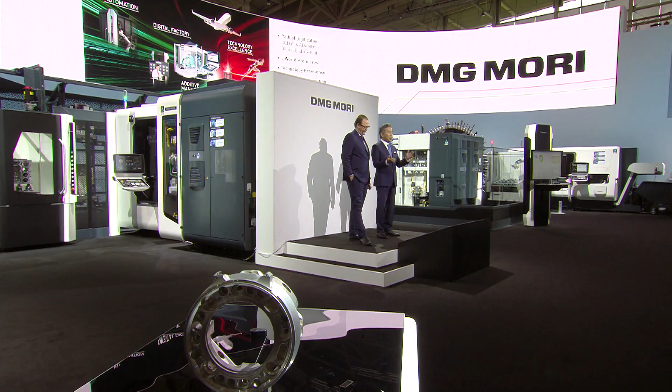Remember, about four years ago, we first introduced Celos in Hannover. Then at that time, people saying, or even our people saying, it's just operation panels. Now you can see that we have very close to 30 application programs with DMQP and technology cycles.

So ADAMOS is just started, but working together with a group, and this is the most democratic, commercially available connecting software for the shop floors.

We also introduced 8 world premieres. I will explain later, the technology excellence concept for aerospace industry, automotives, medicals, or die and mold, and the DMQP working together with partners. We will bring one-stop solution to the customers. And the additive manufacturing, we are becoming a complete solution provider for direct energy depositions.

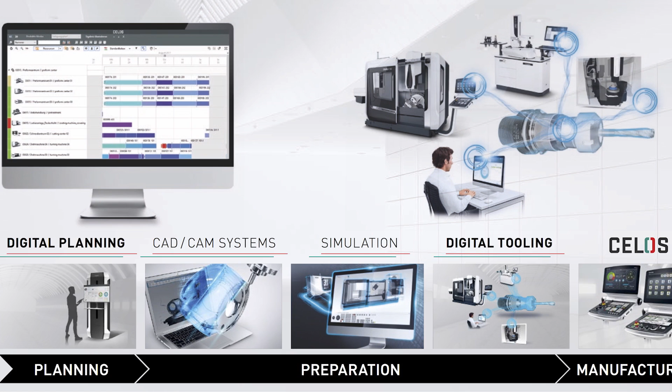A particular highlight is our app factory planning. You see it here. A big chunk, 95%, still work with Excel lists. Excel used to be very useful, but you all know that this cannot be the future. And if you have a good, clean planning process, you have a higher level of transparency and better productivity.

Digital tooling helps to improve the tool handling in a continuous way. The most decisive thing is that already from the planning until the level of machine execution, and in future you will see that we will also offer apps for the service. So we support the customer in the overall product cycle in a continuous way with digital solutions and apps.

So why digital? Most of the people in our company have a very long history with analog data. That is very important, craftsmanship and the history of the technologies. But in case of analog storage, it is very difficult to scan or refer to or learn from the past.

Putting everything into digital, it may not be as accurate as analog, let's say plus minus 5% variations, but by putting all the know-how and the past experience, success and mistakes into the digital world, then the younger generation can refer and search such kind of technologies in a very quick manner.

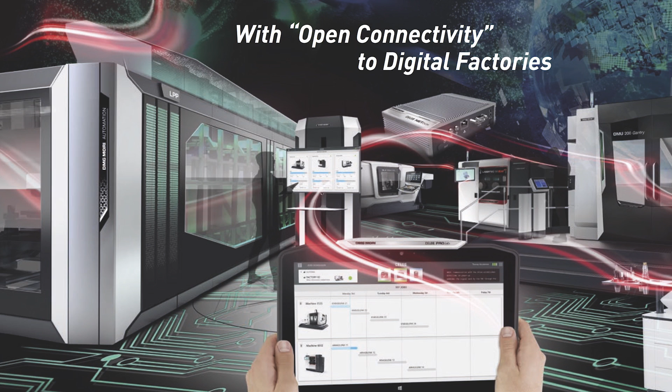What you see here very clearly is that we always think in terms of products. This is not fantasy, we do not only want to give you just information for your articles. We want to deliver products. We start with the NETBox, with preparation of the data, visualization, and then data analytics. We want to offer intelligent and adaptive processes and products. The positive thing is that we are showing concrete applications for our customers.

Netbox, ProTap, and Cockpit. On one hand, you have our machines, but this is also open to third companies. Everything in one environment. And this is now the highlight, something that we've developed lately.

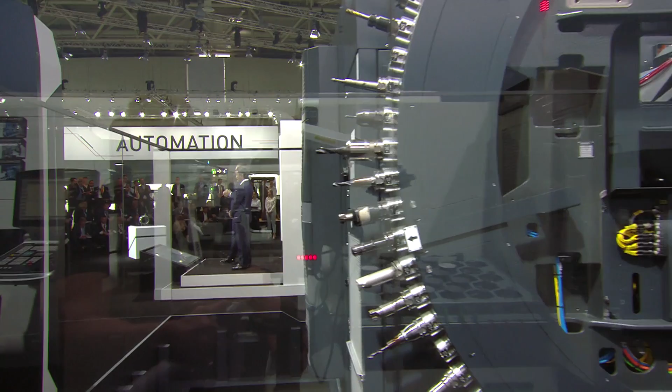ADAMOS, not the sailor's cockpit. ADAMOS, to put it in simple words, used to be an idea of the aerospace industry, and we transferred it to the machine tool builders branch. We, the partners, are convinced that such a solution should be an open platform, and it has to be continuous. We, as big innovators, together with other partners - Dürr, Zeiss, ASML, ASM, and also Software AG with their digital experience - we are convinced that we offer a perfect solution. The idea is that we are offering a continuous solution for the machine, from machine builders to machine builders. It's a fantastic solution for our customers.

At this moment, there are many requests coming from customers: please connect my shop floor to SAP or other ERPs. Also, most customers have FANUC controls, Siemens control, Heidenhain controls, and others. Of course FANUC has a very beautiful field system, Siemens has the same thing, but two companies working together is very difficult. So we are in the position to connect 2-3 different standards together and make factory information together, and send it to an ERP for those kinds of requests.

From now on, we have a lot of turnkey orders already from our customers - our machines and the robotics and washing machines, deburring machines, laser markings, those kinds of things. We will make a test case and user case in Germany, Japan, United States, Canada, or other countries. So you will see the connected factories by the application of ADAMOS very beginning of next year, towards the next AMB show, IMTS, or JIMTOF time.

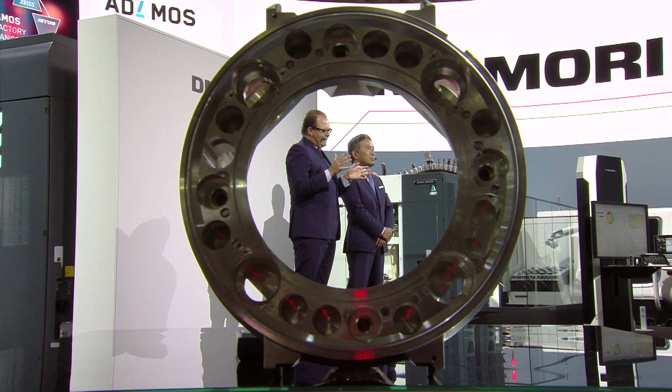The platform beneath it, the technology enablement - this is where you have to think big. Software can only be big. Mr. Streibich, you always talk about leading edge, and we are machine builders. We have 150, 200 people, and we have them in DMG, Dürr, and Zeiss as well. We do not think the way you think, the way a software company thinks. I mean, software is not control, and machine tool builders think in a different way. This is why it was important to have a partner which is leading edge on the market and who is already investing one billion euros in this platform on the market.

So thank you very much for your commitment, Mr. Streibich. You were the initiator of this platform. And Mr. Dieter, thank you as well. Last but not least, not only do we want to be scalable with our software, not only do we want to have the best app developed together in an efficient way, we also want to have a good pricing.

We want to be there for our customers because the problems we need to solve as machine tool builders are very similar, and this is why we think about it this way. I'd like to quote Dr. Mori - he always speaks about a democratic platform. We want to be open, we're not excluding anyone, not excluding any competitor. We think in systems and base our cooperation on trust, and I'm sure you'll see some user cases and concrete examples in the coming months, at the latest for the Open House. You can ask us, how are we showing this in a real case?

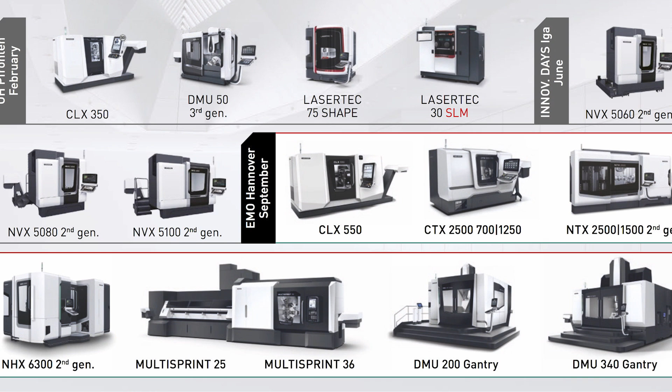You can see these beautiful machines - each factory has a competence. Pfronten is the center for 5-axis. Seebach makes column moving type machines. Bielefeld handles additive manufacturing for powder bed, and wonderful turning machines. We have two Italian factories for multi-turning machines, and also the IGA factory is for big to medium-sized horizontal mill-turn machines, with another dedicated to automotive. So we have a very good concept for each factory.

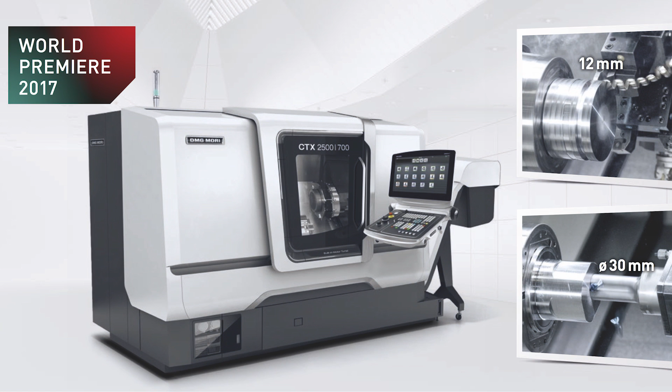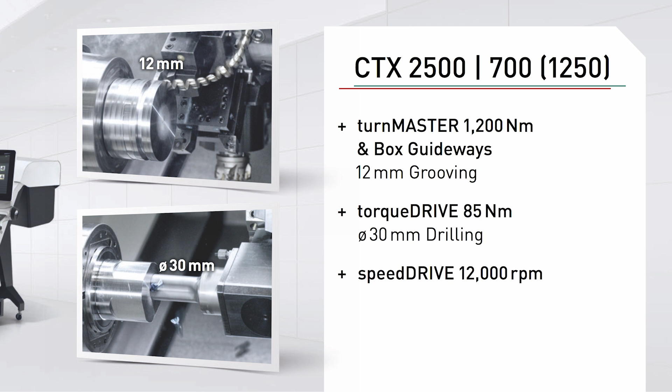This is very exciting - bringing the legendary, reliable, famous NLX machines and all their turning technology to Bielefeld. The workpieces are machined by our Famot factory in Poland, combining Japanese craftsmanship with German and Polish technology, with Siemens controls on top. We're very proud of this machine's cutting capabilities. This is one of the world's most reliable, tough, and precise machines with perfect thermal stability, along with many technology cycles and automation.

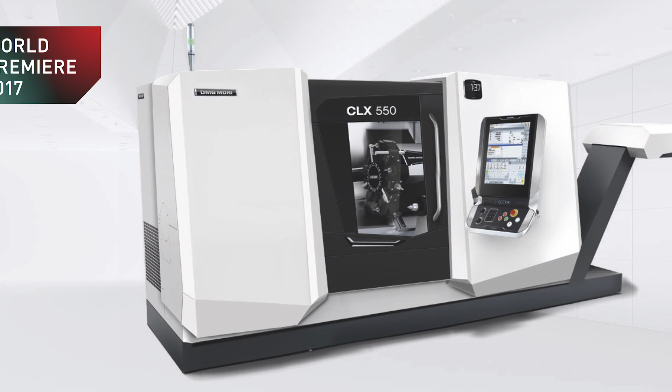The CLX 550 is made in the Tortona factory with FANUC and Siemens control. This is the most competitive machine in a price-attractive market, with Y-axis and milling functions, good for startup machine shops as well as relatively cheap labor countries or cost-efficient manufacturing.

Aerospace Excellence Center. The press asked me yesterday, how do you deal with electromobility? The first answer is we have a lot more products, not only powertrain. Aerospace is one of the main sectors, and with our Excellence Center we can start and develop new solutions from the very beginning in cooperation with our customers - for example, for titanium machining or Inconel. This is why we've already reached several million in orders at the Aerospace Center, and I'm quite sure next year we'll be able to double the introduction of the Power Master spindles. For the last 5 years, German and Japanese engineers have been working together, bringing our past history and quality lessons learned, plus successful stories, working with a top-notch bearing company like Schaeffler. Finally we succeeded in making this Power Master one of the most reliable and strongest spindles available in the market.

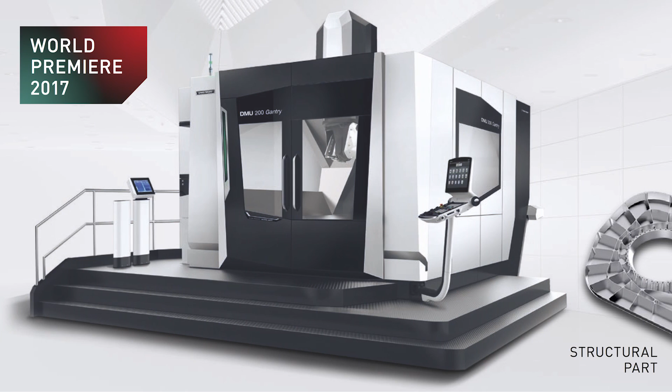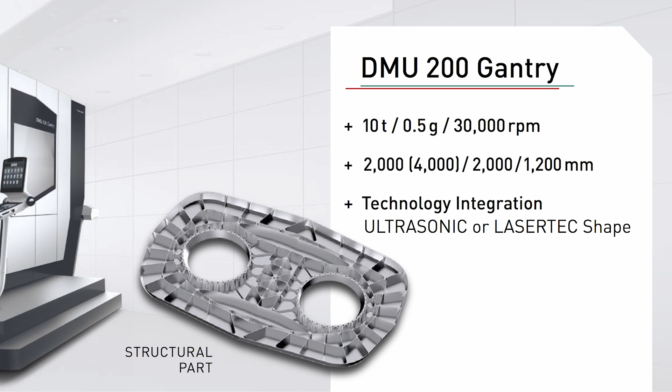You ordered them for your factory in Japan. A lot of machine shops in Japan, Asian countries, or even Germany and the United States are using very conventional, non-covered, low speed bridge-type machines. We want to bring innovation there - fully covered, high speed spindles, and much faster ATCs.

Compared to the conventional bridge type machines, this machine has 5 times more capabilities. So in short, if a customer has 5 or 6 machines for the bridge type, we can make it just with 1 machine.

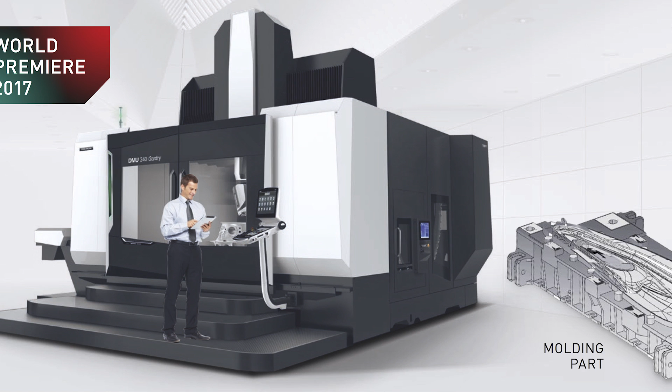By 2030-40, European, Chinese, and some California governments say no more engine cars. So more electric vehicles, AI driving, and the shared economy will change the complete transportation system. We currently depend on about 25% of our sales on the automotive industries, and we think this will decline to 15% in the next 20 years. But there is a huge opportunity for us to grow.

One opportunity is that more chips are required, semiconductors, meaning they need vacuum chambers, high-end valves, and those kinds of things. Huge opportunity for us. Also, the medical industry, because the population is becoming older, means we need more die and mold for plastic handling.

That is the reason we introduce anything related to die and mold, not only for automotive but also for plastics, sheet metals, exotic materials. The importance of die and mold becomes critical once again, and there is no place to make cheaper die and mold. You cannot outsource it. European people cannot outsource die and mold to China or anywhere else. Europeans must make all their die and mold themselves with very innovative 5-axis and surface finishing technologies.

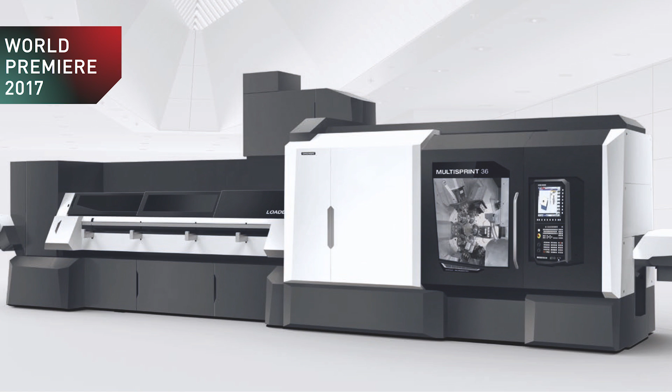Multi-sprint, 25, 36 - this is my area, MULTISPRINT 25, 36. This is the highest degree of productivity.

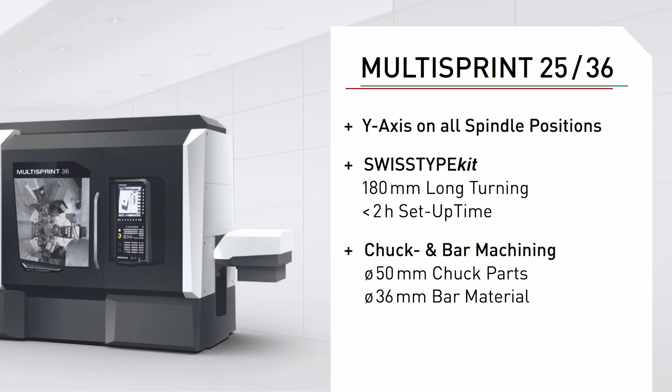In our 14 factories, we have decentralized development structures and many products in the pipeline at the same time, and we are very fast. But this is what we managed in Bergamo. This is a promise I made to the employees. I said: if we manage to make this factory healthy, you will be able to present a revolutionary concept at the EMO.

The result is this: the MULTISPRINT 25/36, a new working area which is open. It has a Y-axis, ideally positioned for Swiss type, for long turning parts. What is more, you can use it for chucks and for bars.

The only thing we won't achieve now is the ramp-up with the customer, because we won't push this machine into the market. The machine will be tested again and again. The first 15 machines were placed with customers. We are in close contact with them, and we want to offer the utmost quality, because production means quality. And in terms of quality, I learn a lot every day from Dr. Mori.

The Japanese are not perfect, but they work on the detail. They make no compromises when it comes to quality for customers. So we will not push the machine, we will use the classical pull approach. We will test it, and then deliver it to the customers who want this machine.

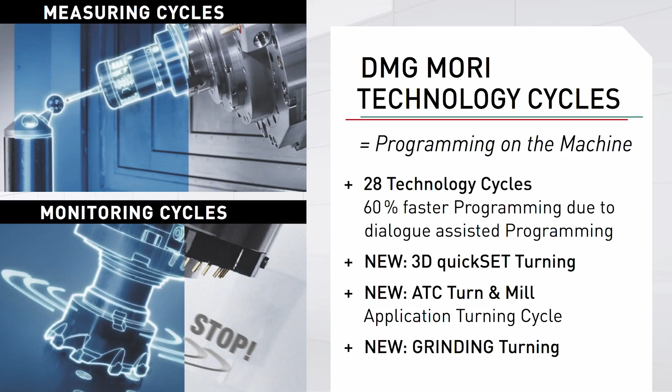Technology cycle is very important. In discussion with customers, we only talk about 4 things: how do you handle the workpiece or tools, how do you measure the workpiece or the tolerance of the machines, how do you machine the workpiece, and how do you monitor the machines or your factories. All our activities can be categorized into these 4 things: handling, measuring, machining, and monitoring. We are starting to prepare many different technology cycles across these 4 aspects.

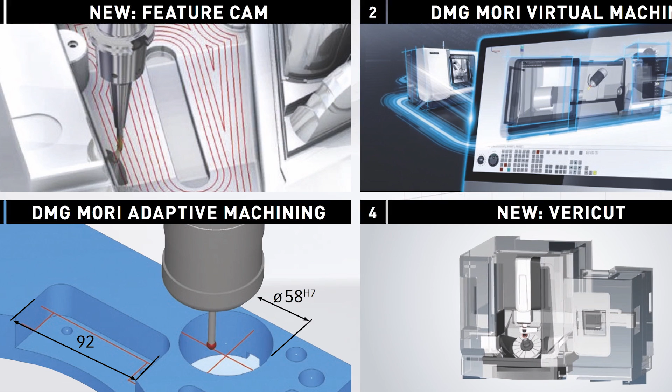Same for Powertools. You have assistance on the machine with the programming, and with the Powertools we have programming assistance in the CAD/CAM environment before the machine.

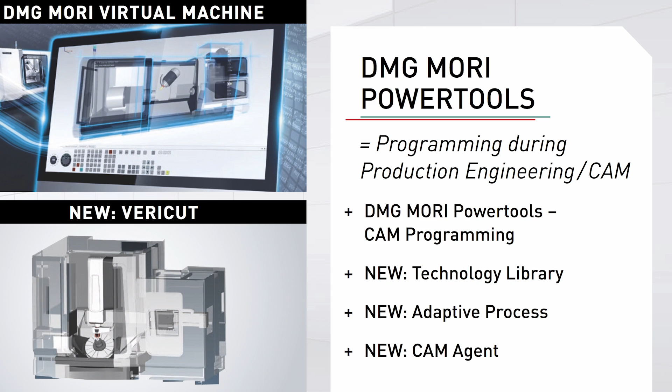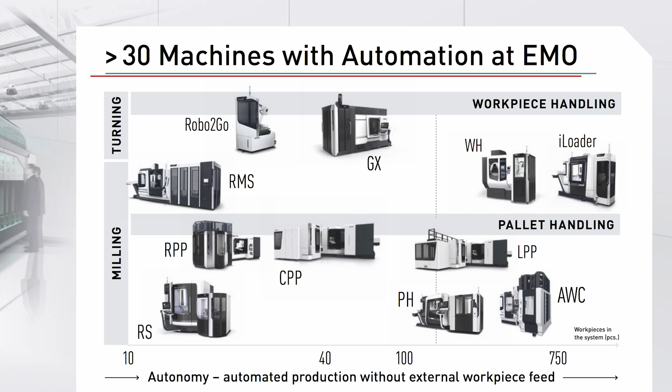The most non-productive work in the shop is putting the workpiece or material into the machine and taking out the machined piece from the machine. So I strongly believe that in the next 10 years, automation or workpiece handling will become the standard option or part of the machines.

We propose many different kinds of automation at this stage. One is with multiple axis robots, another is gantry loaders, another is pallet handling, and another is work handling. We are fully capable of making any kind of automation related to machines and machine tools. These innovations will continue, working together with some partner companies.

You will see more and more advancement at the Pfronten open house or next AMB show and so on.

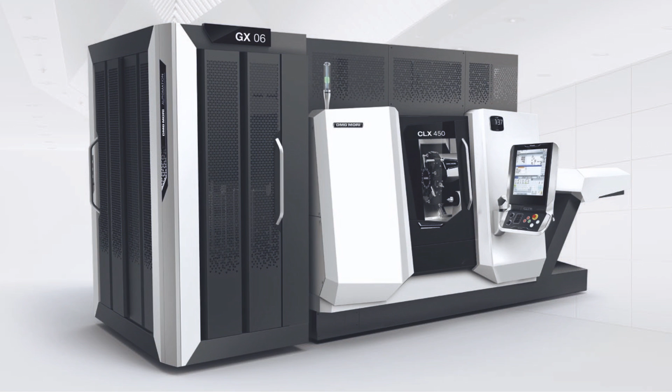It's a very nice example for this very strong structure within the DMG MORI group. We looked at the gantry loader from Japan, made 2 or 3 improvements with the new vertical design. Here it's one machine with an automation for 69,000 euros, and I think you will pay for it within 1.5 years.

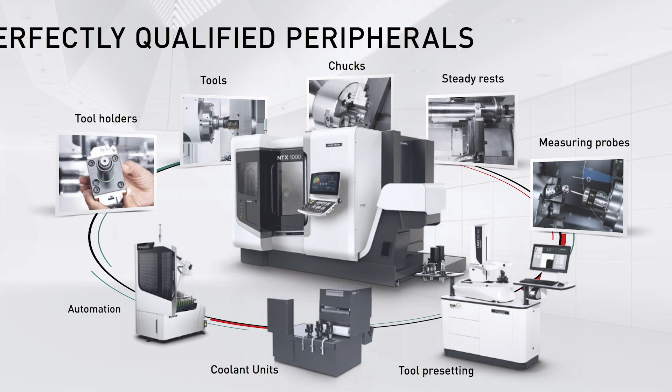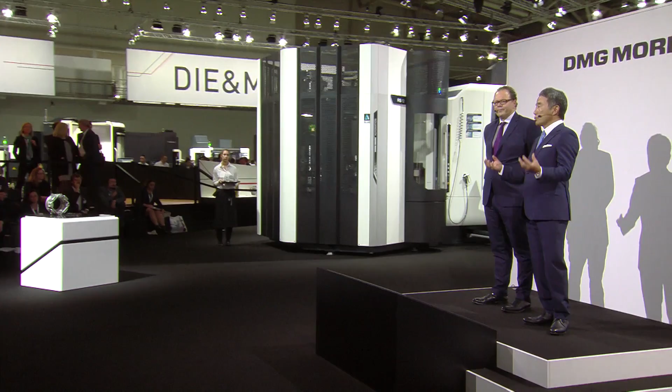In European countries and the United States, we do direct sales so that the customer expects us not only to sell the machines, but to provide one-stop solutions. Also for our DMQP partners, we have 150,000 customers all over the world, so that if they work together with us, we open the door for them to any corner of the world for the peripherals of the machine tools. By using this network, we asked most of the majority partner companies to join ADAMOS and the connecting environment. We wanted to make the strongest group and the easiest to work with for our customers.

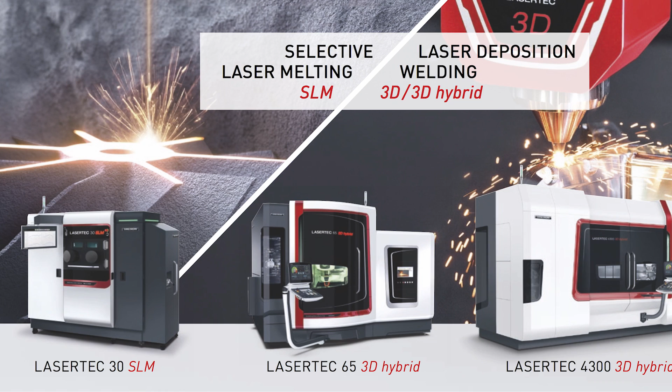Additive manufacturing. DMG MORI is a full liner when it comes to powder nozzle and powder bed technology, for large parts with sandwich structures but also for small filigree structures, and also the competence to deliver finished parts with finished surface quality.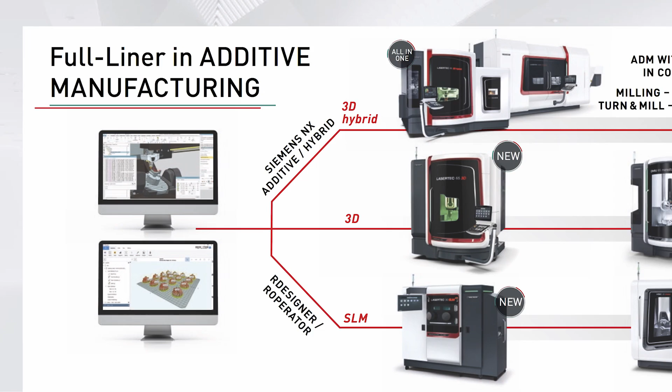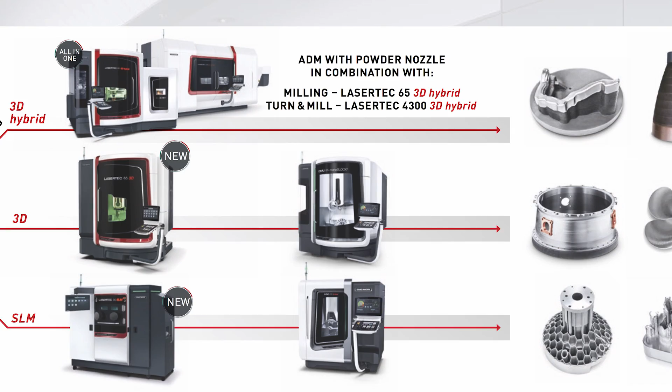And then a holistic, end-to-end process, because we have programs first on additive machines, and the same programs are used in a cellular environment on the adequate milling machine.

We've delivered 60 3D hybrid machines all over the world. Some of the workpieces, like this rocket nose, are already in space. So customers use us for very high-end aerospace industries, as well as some medical and energy applications, and also for fixing turbine engines of aircraft, and the repair of high-frequency molds for stamping dies and so on.

The hybrid machines are relatively very expensive because of the 3D functions and cutting functions combined. So we got a lot of requests from customers for additive-only machines, and that's the reason why we developed the 3D-only machines.

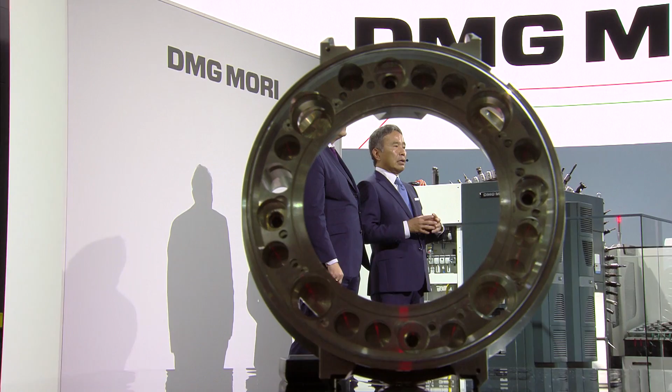I'm very excited about the SLM solutions, because we can use the material knowledge we've already accumulated - a huge database on things like the size of the particles, the contaminations, and the power of the lasers, and so on.

We're also delivering machines to universities like Keio, Kyoto, Berkeley, Davis, and Hannover, working together with academia, so our speed of knowledge accumulation is quite fast. I'm very excited to work with new potential customers, especially for powder bed technology, and we can become a very open-minded solution provider in the additive field as well.

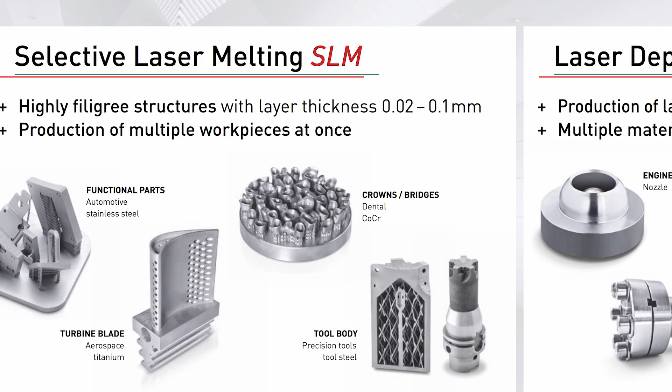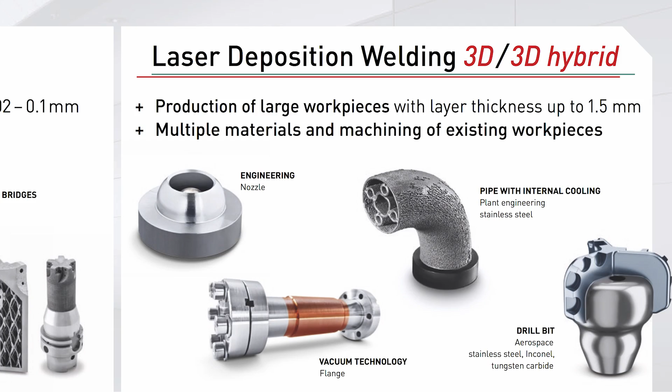These are just a few examples showing the type of workpiece that cannot be created by normal machining. But not all workpieces can be replaced by additive manufacturing - this will be about 10%, maximum maybe 20% of the manufacturing field in the future. Additive is additive - additive technology is added to the normal chip removal technologies, like other ultrasonic or laser techniques, and we would like to have this function available for all of our machines in the future.